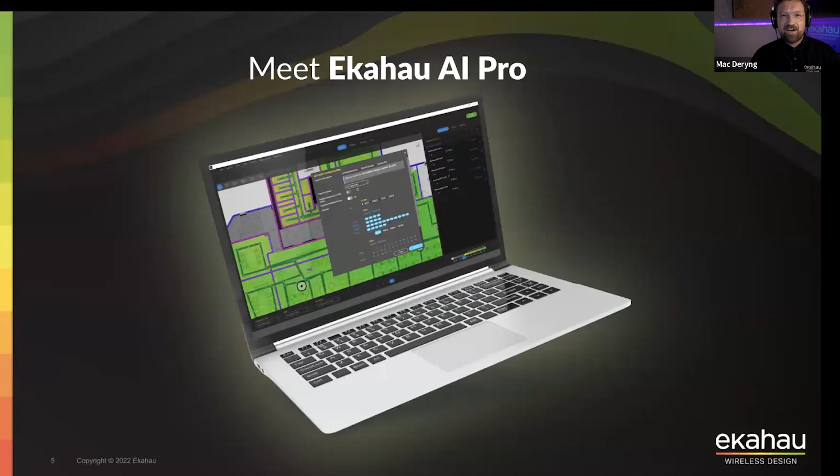But why we are here today, I'm going to let Mac talk to us about. Thank you very much, Matt. We really thought that we were masters at sneaking in those little hints here and there. We wanted to hide it very well, but we failed at it. You outsmarted us, you got us properly. So well done to all of you Sherlock Holmeses from around the world. You got our hints and you predicted what's coming. So, ladies and gentlemen, boys and girls, it's time to lift the curtain. We wanted to introduce to you our new smashingly amazing, extraordinary, sexy product. Meet Ekahau AI Pro. The time for 6 gigahertz is now.

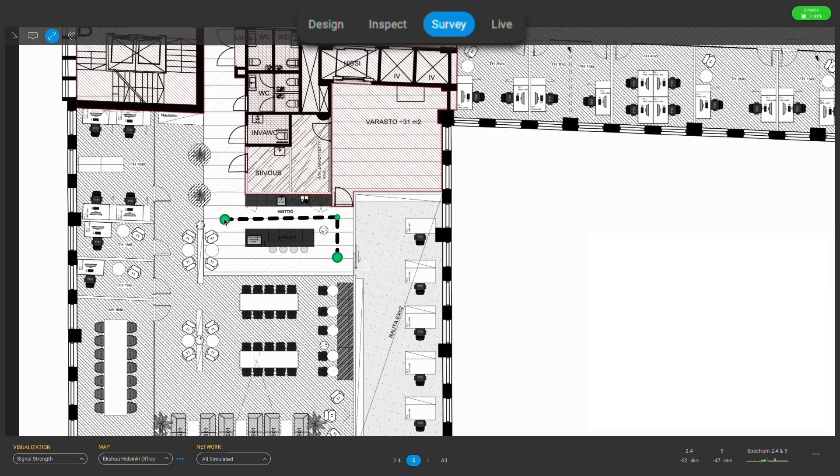Well, if we weren't pumped up and excited before, then I don't know how we're going to contain ourselves. That was just freaking awesome. I completely can't contain myself, Matt. I have never been more excited in my life. So needless to say, I won't be able to sleep for at least 6 months straight now. I haven't slept all week. I've been so excited for today and this webinar.

But over to Anssi and Mikko to formally introduce to you Ekahau AI Pro. Thank you, guys. Your excitement is very catchy. I'm getting very excited as well here. So we can finally talk about it. This is a huge day. You know, we've actually been waiting for a while until we could start talking about it. I'm sure this is something that our users have been waiting for a long time. But also, this is an important milestone for the entire team.

Someone might remember that we actually talked about this for the first time already 2 years ago, right? There was an Ekahau Wi-Fi Day event in spring 2020. And in that one, we actually made a forecast about the Wi-Fi 6E rollout. I think our assumption back then was that the mass rollout would start in early 2022. And that actually seems to be pretty much right. We can see the first trials now, and we can see the first access point models in the market. We can even see some first commercial deployments.

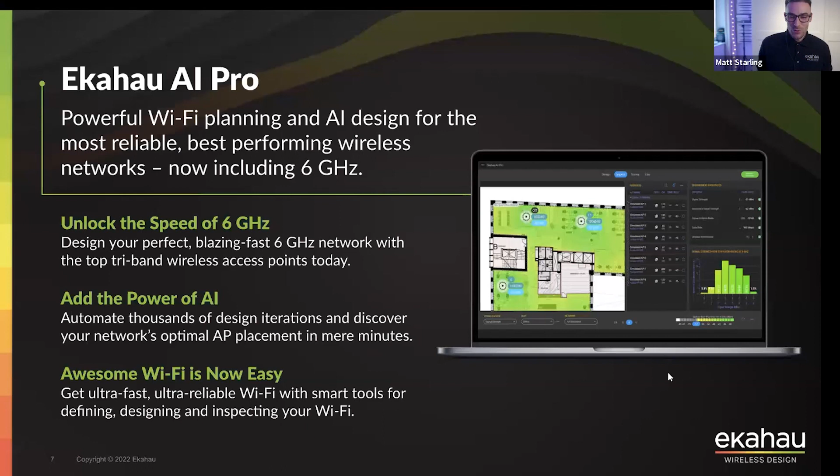Cool. So actually, you know what? Whilst we were in Helsinki, you weren't too forthcoming with answering some of our questions, and we were trying to get into some of those meeting rooms and you were kicking us out. We wanted to get some answers. And you know what? We thought, what better time to do it than on a live webinar and just put you on the spot, because we've got these questions.

I know that there's going to be people in the audience wanting to know the same answers. So first of all, to you, Anssi, is AI Pro a free upgrade for all users with a current support subscription? Yes, absolutely. Wow. Another question is for you, Mr. Mikko. If I open up Pro later today, will I get a prompt to download a new version? Yes, it will. Give us a bit of time. So after the webinar, it will be available.

Amazing. That is amazing. And then another question for you, Anssi. Does AI Pro support both macOS Monterey and Windows 11? Yes. Great. And the last question for Mikko. Does AI Pro work with the Sidekick? Absolutely. So answer is yes. Oh my God. Fantastic. Great.

Cool. So Mac, let's talk about unlocking that promise of 6 gigahertz. Why don't you cover 2.4 and 5 first? Sure. So today, we not only need to have more throughput, higher data rates, but we also need to have massively lower latency to support new applications that are becoming more and more popular, like VR or AR. And we also need to cater for voice and video on a daily basis in our lives.

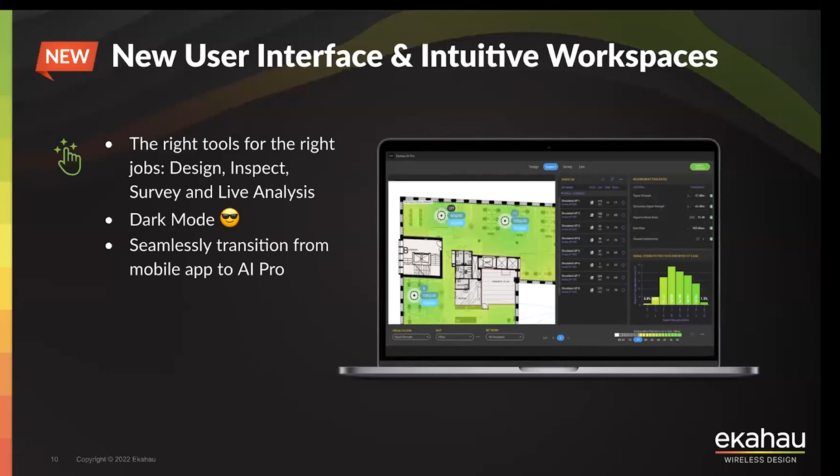And of course, there is a multitude of features that simplify the design and validation process. But maybe enough talk, and let me give you just a glimpse of what I mean. All right, so let's unbox AI Pro. When you launch the application, you will be faced with the welcoming screen, and here you can create a new project, open one from your local drive or from Ekahau Cloud. I have a couple of examples we can use to see all the new layouts and some of the features. So let's open this up.

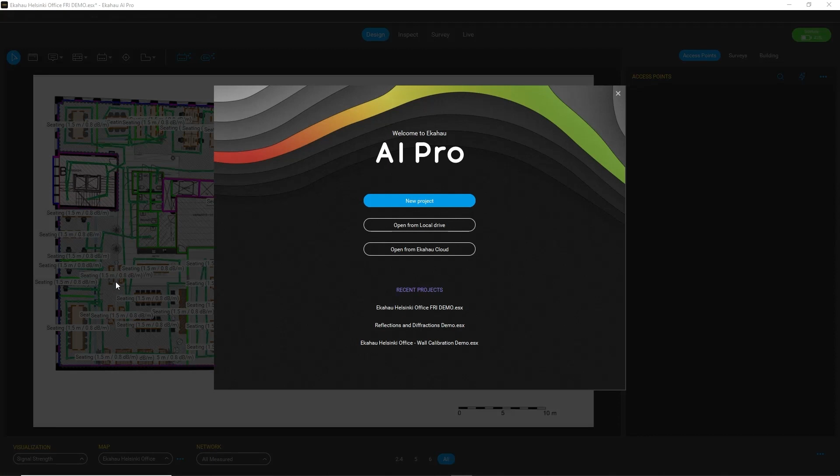And the first thing you will notice beside the cool new dark theme is that the layouts are different. We put a lot of emphasis on the usability of the product. And one of the aspects I want to highlight is the new workspaces. So here we have introduced separate workspaces like Design, Inspect, Survey, and Live. The main point is to separate different functions to these workspaces so it's more intuitive to use.

For example, in the Design workspace, the main function is to bring your floor maps in, define the buildings and draw the walls, as well as define the requirement areas and requirements, and of course set up and define your wireless network by placing access points or using some automatic tools to do that for you. So that's the main function of the Design workspace, to be able to define your environment.

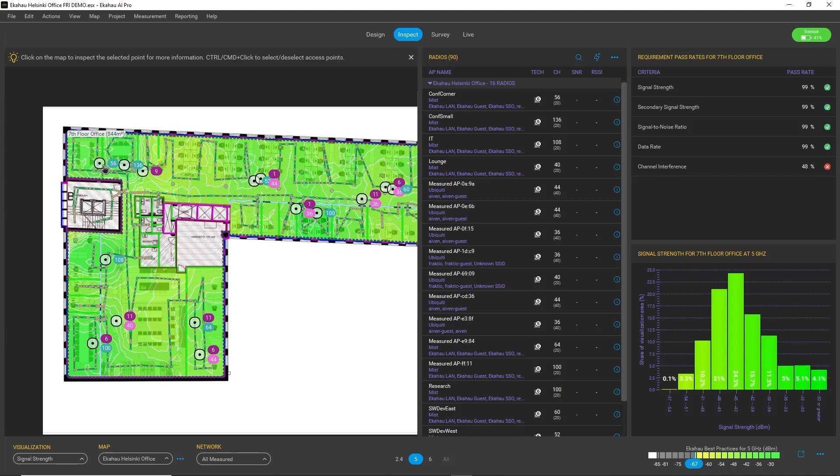Moving on to the Inspect workspace, the beef of the Inspect workspace is to allow you to analyze your data. You can select any spot on the map and it will immediately highlight to you the connections and what access points are heard from this location.

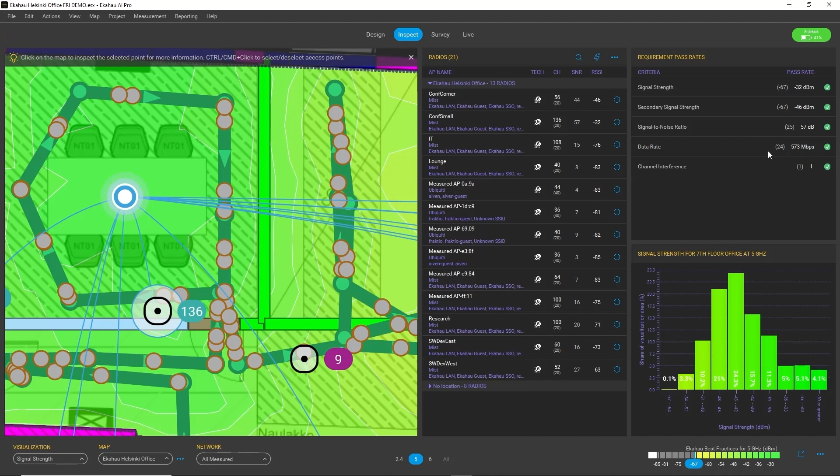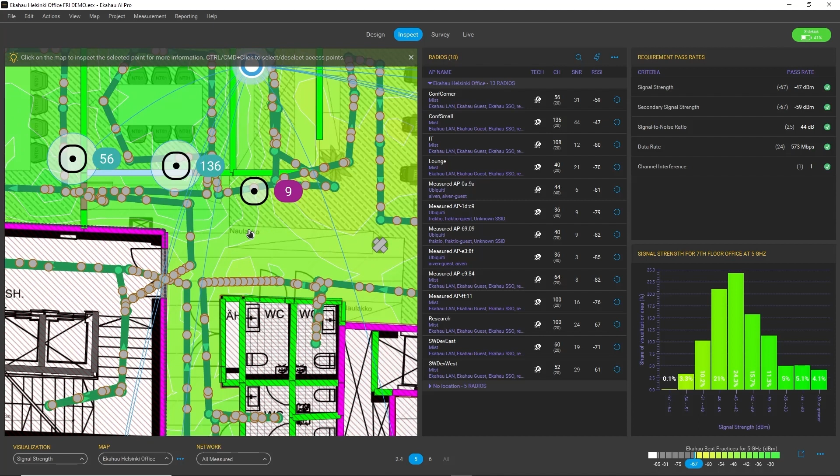And you will notice also on the right hand side that the values are automatically updated. So all the requirements that I have in my requirement profile are now shown in the list. I can immediately see from the list whether some requirement is met in this selected spot or not. So a very handy space to analyze this kind of data.

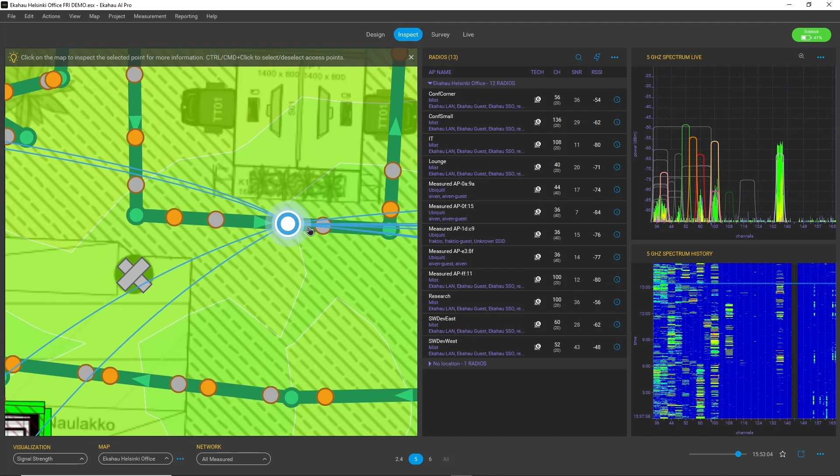In addition to that, I can also select any spot of my survey path, and that will immediately highlight the spectrum graph from my Sidekick as well as the waterfall graph. I can scroll through these measurements and analyze them separately for these spots, or if I deselect everything, I will see a summary of the whole floor and the requirement area. So I can immediately with one glance analyze whether this requirement area is meeting my requirements or not.

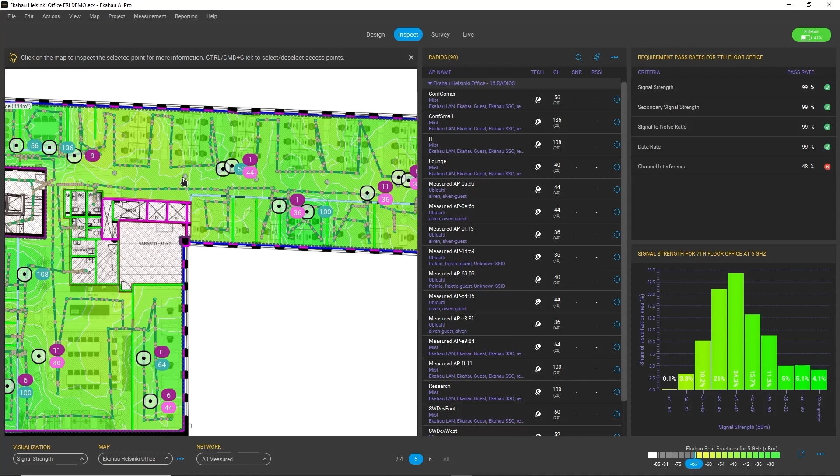If we move on to the survey workspace, this must be familiar to you if you have been using our iOS mobile survey application. So now these spaces are in line with our apps, and you will also find the continuous and stop and go survey capabilities in this space. This is meant for on-site surveys.

And the final and most interesting workspace is our live workspace, where the power of Sidekick becomes apparent. So here I have my Sidekick connected. I can see the spectrum real-time view. I can select different access points. I can also view the waterfall graph and switch between the radios view or the channels view.

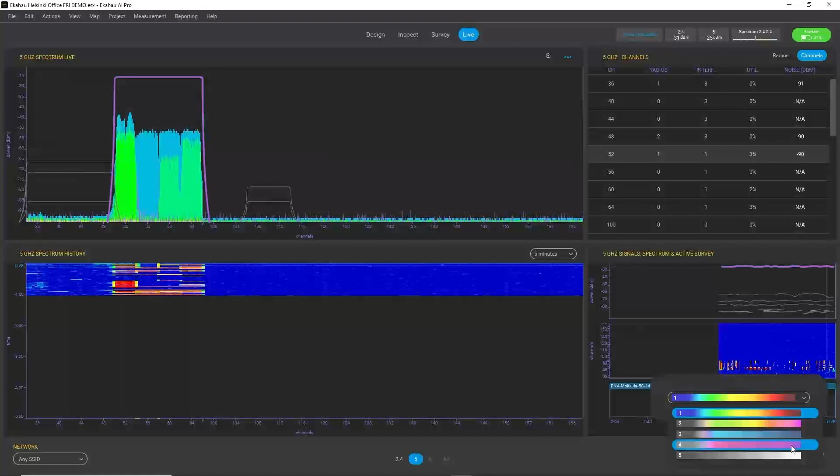One new cool addition in AI Pro is that you can also now switch between different color schemes for accessibility reasons. So if you are not able to distinguish some colors, you can always switch to the Miami Vice theme to see the colors in this mode.

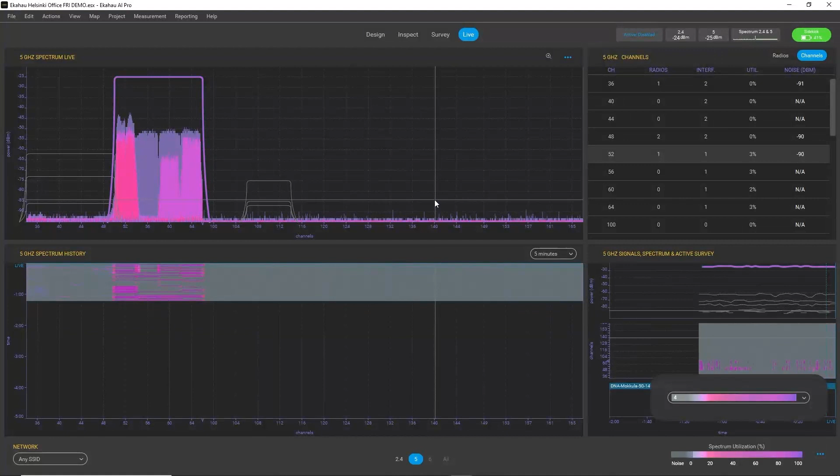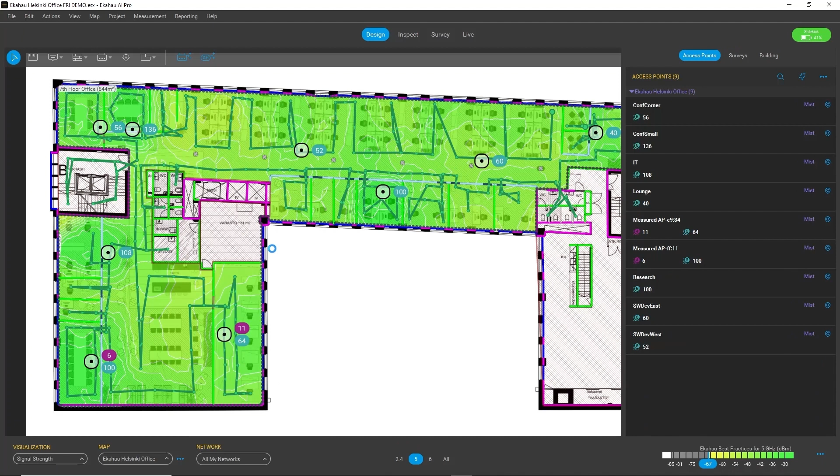Going back to the design workspace, one interesting feature that we added to AI Pro is that here we have a brand new network filter, which allows you not only to filter out a custom access point group, but you can also filter out any network or all your networks you choose. So a very powerful tool for filtering out your access points and viewing different heat maps.

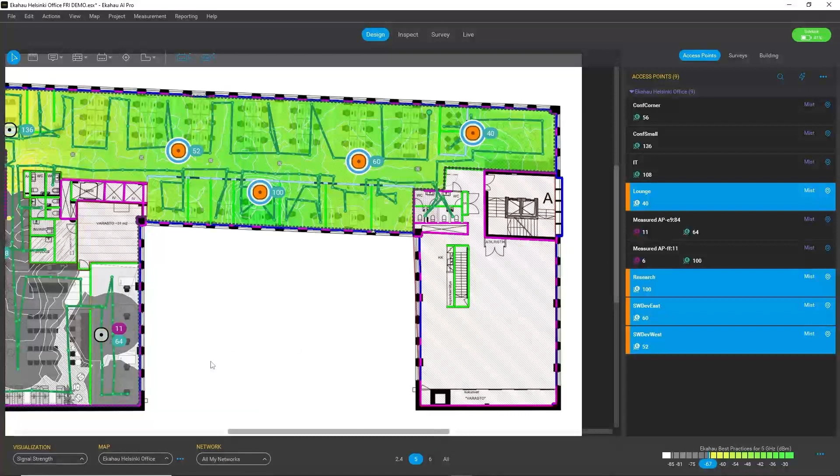You can also define a custom access point group. For example, you can choose the access points here on the east side of the office, and by right-clicking on the list and marking them with some color like orange, I can create this custom group and it automatically becomes part of the filter. So a very powerful tool to select different groups and analyze your heat maps.

So this is just a small example of the new stuff we have implemented, and you will find many more positive surprises once you start using AI Pro. So very proud of this.

Oh, Vlad, there is so much goodness there. First of all, dark mode. Hello, who doesn't love dark mode? Every time I've opened up AI Pro, it puts a smile on my face from ear to ear. I absolutely love the dark mode. It looks amazing. And also the dedicated workspaces now for your specific project tasks and needs. You can tell how much thought went behind that with the team for our users.

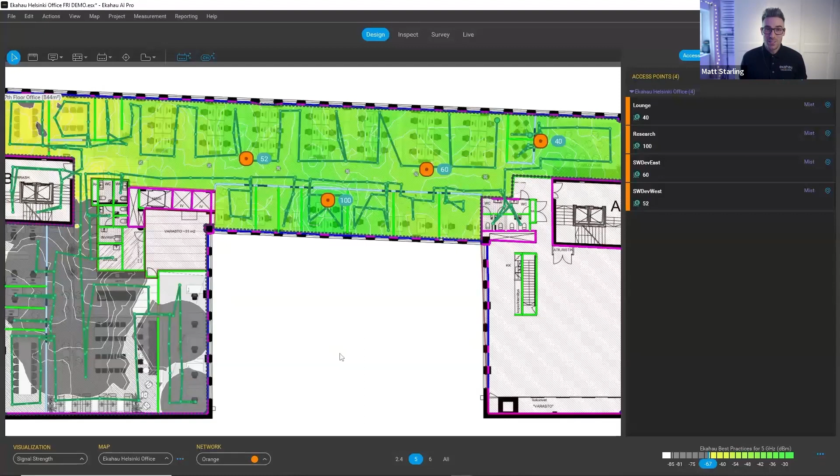But wow, the power of the Sidekick and the live view, being able to see that beautiful high resolution spectrum data. Oh, and the new feature about being able to choose your own color scheme for the spectrum. I think we can all guess what's going to be my new default. I love that Miami Vice color scheme.

And if you need more proof that we both love the Miami color scheme, just look at our backgrounds. Guys, every time I switch to the Miami Vice color scheme, I want to cry from happiness. All right. Wow, that was amazing, Vlad.

But I think we've got to talk about AI Auto Planner now. Yeah, and I actually wanted to ask something of you, Matt and Mac. What do you think are the most tedious and boring tasks you have to deal with when designing wireless networks? Is there something like that in your life? I see what's happening here, Mac. They want to get their revenge and put us on the spot live on the webinar now.

Fine, fair enough. For me personally, what I think is sometimes the most challenging, especially if you're quite new to Wi-Fi or even if you've been working in Wi-Fi for a long time, is coming up with the positions of the access points in the right locations with the right configurations, right first time. And especially if you're working on a multi-floor project, that can be really time consuming and quite daunting if you're fairly new to Wi-Fi, to make sure you design a high performing wireless network.

So that's what I think, Vlad.

Oh, well, for that purpose, we actually, I think, found a small part of the Holy Grail. Well, at least I hope that that's the case. So now we are able to run AI Auto Planner for your designs, and the AI Auto Planner actually runs thousands of iterations on all three bands, including 2.4, 5, and 6 gigahertz, and it looks at the optimal locations for your APs, taking into account the specifics of your environment, like the walls, the hallways, the room sizes, etc. So it looks at the holistic site as an optimization target, and the results are really amazing.

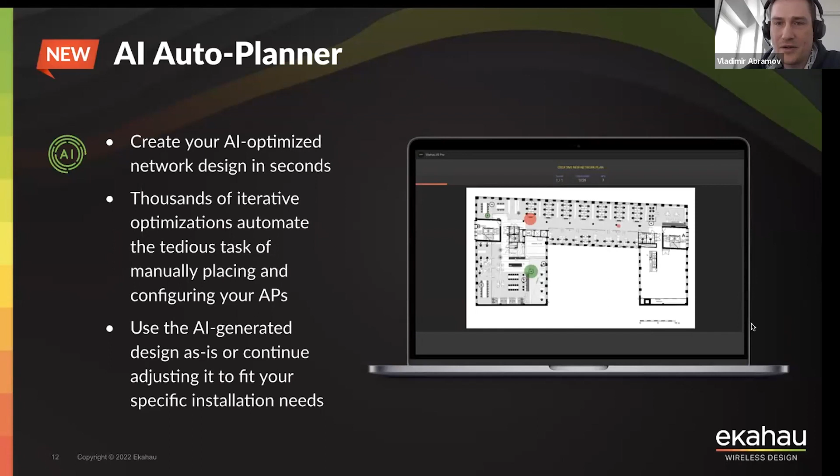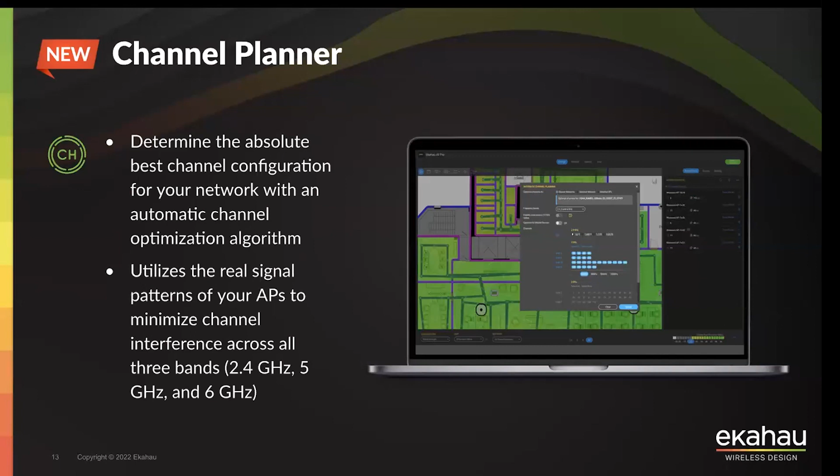And of course, AI Auto Planner has also another part, which is our channel planner. It has been completely redone, so it's a completely new algorithm that is superior, which takes the client perspective into account, and it of course also is aimed at all three bands. All is aimed at enabling you to do the 6 gigahertz Wi-Fi plans. But maybe it's time we take AI Auto Planner for a small spin around the house. How about that?

Let's now see how AI Auto Planner runs in action. So in this example, I have a 3-floor building. So I have main hall, then floor 1 and floor 2. And I have already defined my requirement areas and requirements for them. So here you can see a requirement area selected with Ekahau best practices applied. I have also some drywalls, some windows and doors, etc. defined. So my environment is all set. The only thing missing is my wireless network.

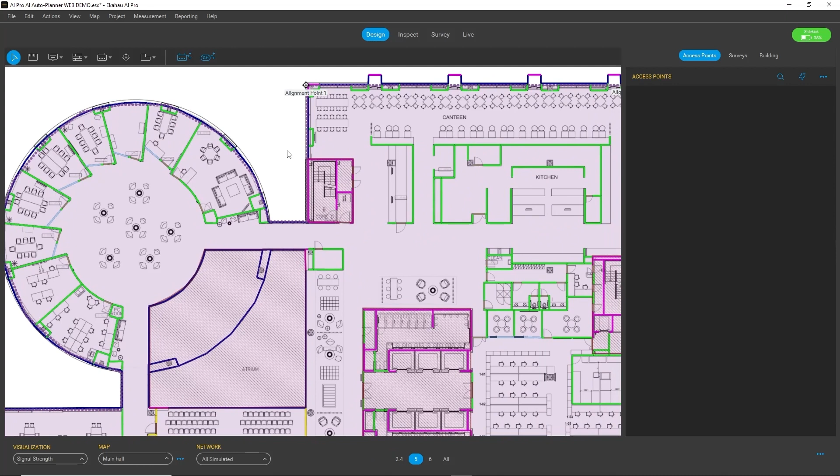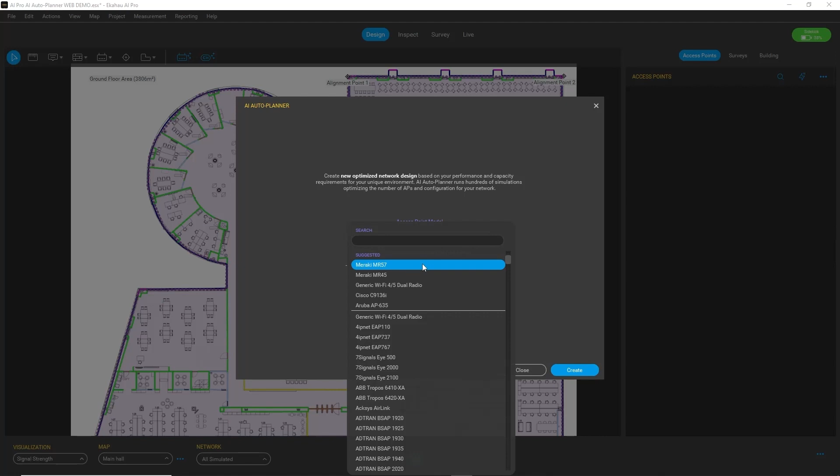And the fastest and easiest way to design it is actually to use the help of AI Auto Planner. And you can find AI Auto Planner from the Actions menu as the first selection. When you fire it up, you will see that you can select the desired AP model for your plan from 1,000 of access points that we support. In this case, I will use Meraki MR57, which is a 6 gigahertz capable access point. So we're now designing for 6 GHz in this plan. I could start the planning process already, but I want to show you first some of the advanced options.

So what you can choose in addition to access point model, you can, for example, define transmit power for each of the bands or select antenna height that you will use. You can also check that all the requirement areas and floors are included in your plan, because the AI Auto Planner not only runs on a single floor, but it optimizes the plan for the whole building. In addition to that, you can optimize for capacity or for mobile devices.

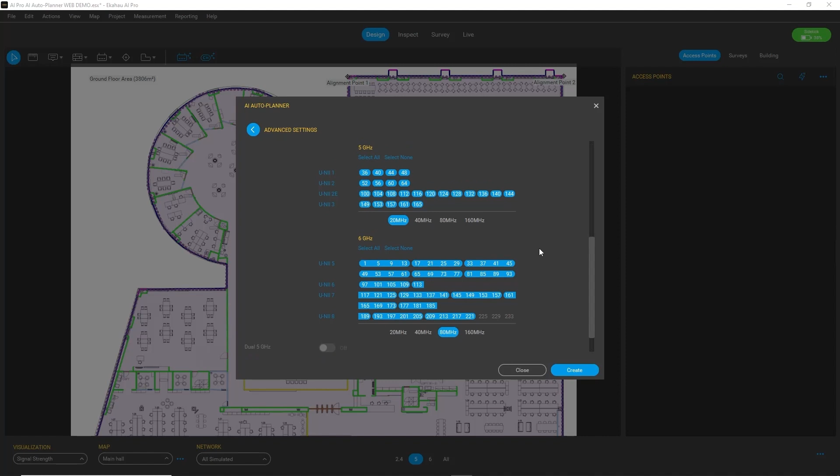And actually, the new channel planner is also part of AI Auto Planner. It's a completely new algorithm which provides you with the optimal channel plans. So, for example, you probably will always be using channels 1, 6, and 11 on 2.4 gigahertz. But for the other bands, you can select any bandwidth and channels you like, as well as for the 6 gigahertz band. Just make sure you have a proper regulatory domain selected so you have the right channels available for you. In addition, you can also configure your network for capacity, for example, by choosing the minimum data rate or number of SSIDs per radio.

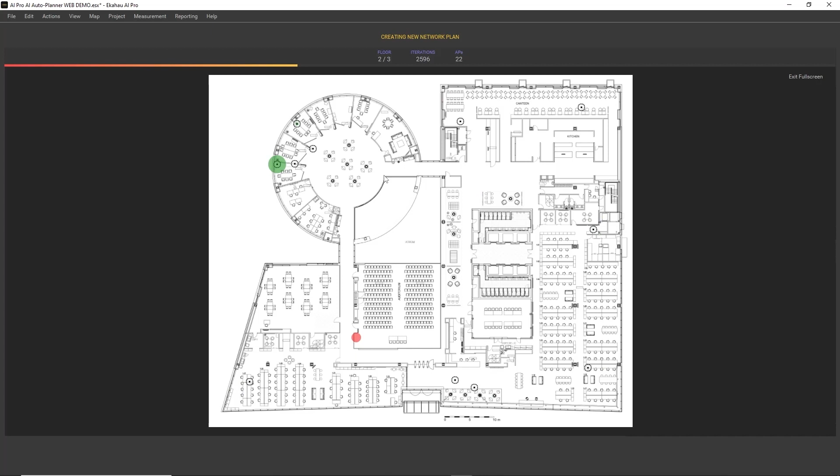In this instance, I will not change any of these settings. I just want my 6 gigahertz network to be planned automatically. So I click create and see what happens. What's going on is that AI Auto Planner is now placing access points on all of my floors and trying to find optimal locations for them, as well as optimal channel configurations for all 3 bands, for 2.4, for 5, and for 6. So that's a lot of work, but as you can see, it's already deploying the plan, and voila, here it's ready. Just a couple of minutes and your brand new plan is complete.

But now we actually need to analyze the results. We need to check what kind of a job the AI Auto Planner did. So we can see from the summary bar that our network health is at 99% pass rate for 2.4, 99 for 5 gigahertz, and 98 for 6 gigahertz. So extremely promising results. And this is a result of almost 5,000 iterations that AI Auto Planner ran on this building. And in total, it resulted in 33 APs.

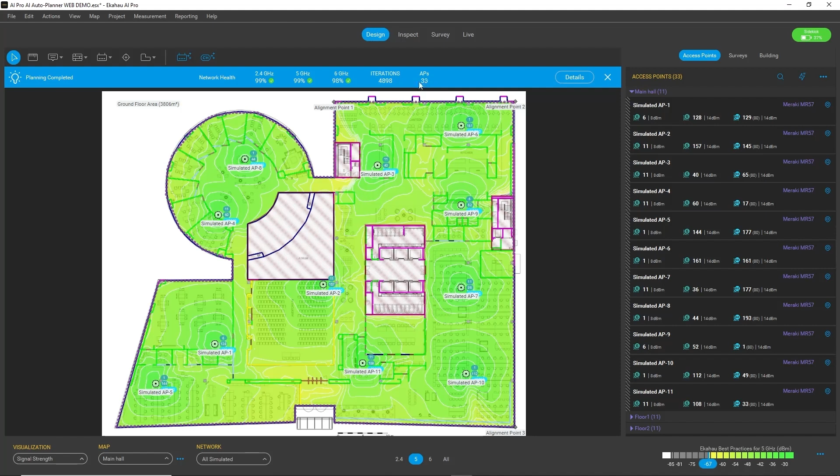We can check the details to see how these APs are distributed. So for each floor, you can see a breakdown. So you have 11 APs for each floor. And on all floors, the network health pass rate is almost 100%. So extremely good results from AI Auto Planner. But let's not stop here.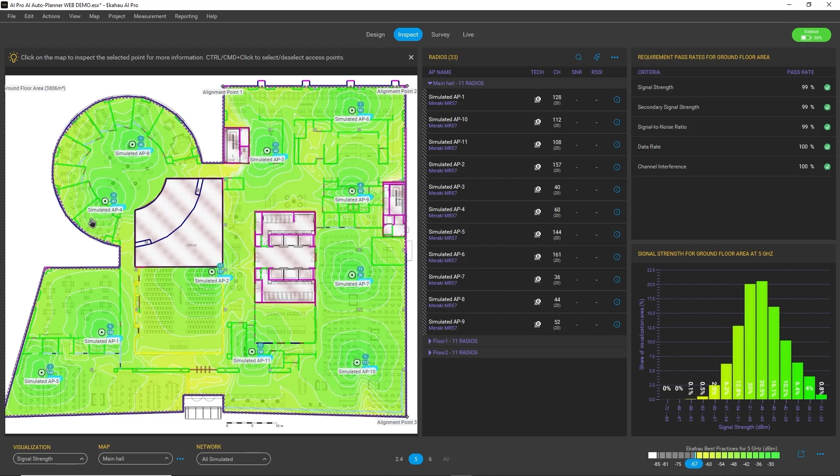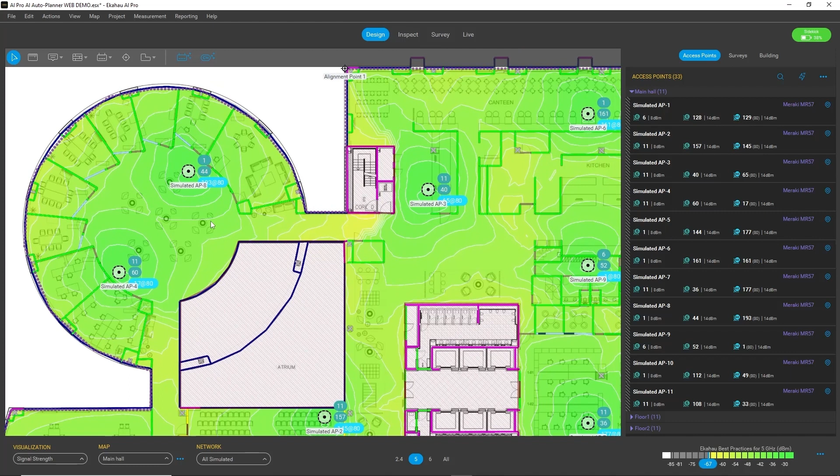And of course, you can still manually, in design mode, for example, go ahead and change any of the access point locations, but the hard lifting has been already done for you. So I'm pretty excited about these features and I hope you enjoy them. So basically we want to leave only the fun stuff to the users and let the machine do the tedious part. Yeah, I mean, Vlad, whoa, wow, that was amazing.

And first of all, that wasn't a matter of minutes, that was seconds to run 5,000 different iterations and come up with an awesome Wi-Fi design across multiple floors. I can't even fathom how long that would take me to do. So to be able to do that with simply a click of the button is just amazing. This really is going to be giving our users the most valuable currency of all, which is time that you can spend working on other tasks, other projects, making your jobs easier, making Wi-Fi more amazing.

So this really blew my mind, and this is one of my favorite, most cool new superpowers that we get with AI Pro. So yeah, I totally love this one. Totally same here. And if it saves you time, it also earns you more money. And my favorite thing now is the new channel planner that plans from the client's perspective, which is absolutely awesome. So well done, team. And thanks, Vlad, for showing it to us.

Yeah, imagine, that was a 3-floor building, right? Imagine if you're designing for 10 floors, 20 floors, 30 floors, how much time that would take you. But you can simply do it with the click of a few buttons to give you that amazing high-performing wireless network design. I mean, wow. And remember, Matt, this is not only for greenfield planning, so not only for clean slate designs, but you can also use it to estimate upgrading your network and see what your whole network would achieve if you redesign it. So you can use it almost any time.

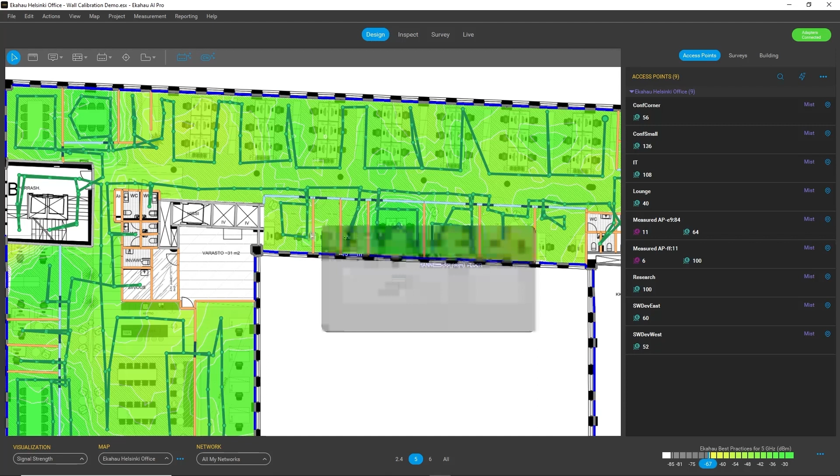So we can improve the situation and use wall attenuation for that. So let's see how it works. We go to the Actions menu, we choose the wall calibration function, and now we can see that it actually analyzes the measurements from your survey paths with Sidekick, and it proposes changes to the default values of different materials.

So for example, for thin door, for the 2.4 gigahertz band, we have a suggested change from 2 dB to 3.5 dB, and there are also suggested changes for other bands. And here the quality indicator means that we have a good or very high confidence level that this change will improve the definition of your environment. That's because of the Sidekick providing many measurement points, and we can say that this change will be a good thing for your environment.

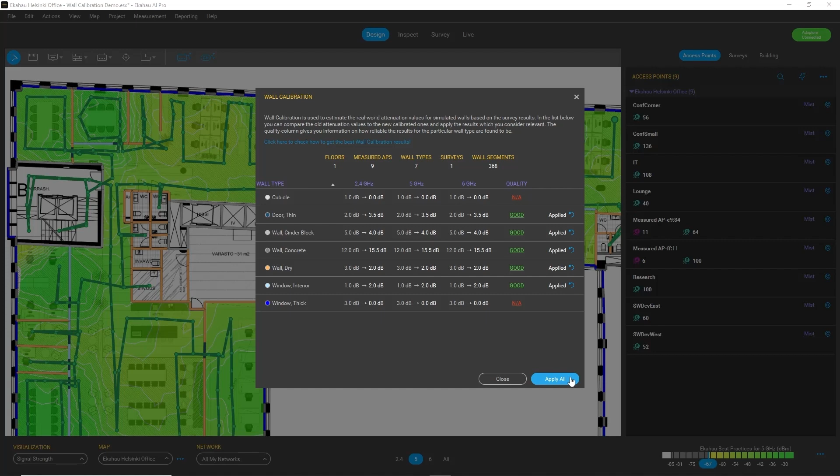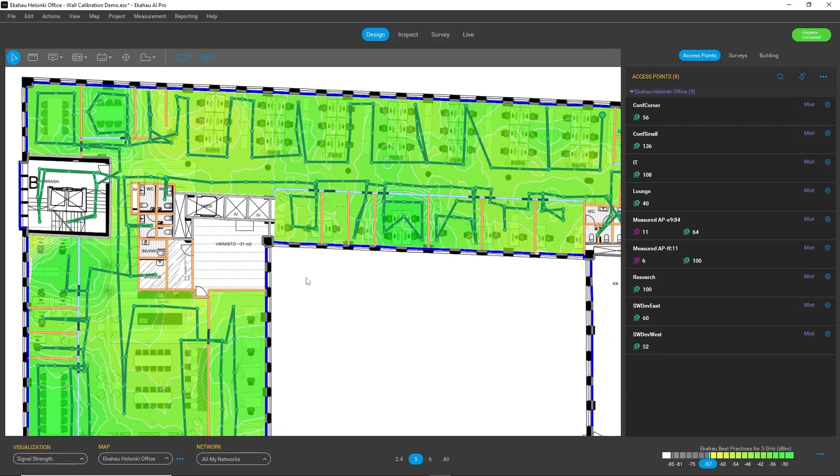So I can apply these changes one by one, or I can apply them all from here. After I apply these changes, when I select some wall material, for example, this window, I will see that now it has the calibrated value based on my measurements here. And the end result is that whenever you do a simulation or other action on top of this environment, it will be much more accurate and correspond much more closely to reality than the default setup. So a very handy feature to improve the accuracy of your simulations. And as you noticed, the wall calibration proposes values for each of the bands: 2.4, 5, and 6.

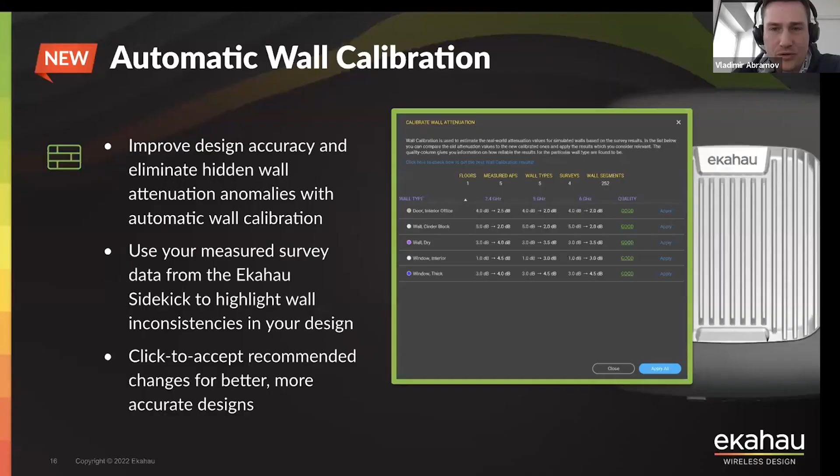So you now know why we call it AI Auto Planner. A lot of AI going on under the hood, right? Of course. And guys, this is such a massive deal. I'm not sure about you, but every time I go to the site and measure wall attenuation multiple times for multiple types of walls, I'm a little bit bored. And not only will this give us better accuracy, but it also saves us a massive amount of time. So it's not only time saving, but it's also extremely easy to use.

So all it takes is to go to the site, ensure that you have Wi-Fi coverage in the area that you want to measure wall attenuation of. It can be the AP on a stick, or it can be a brownfield Wi-Fi, and walk on both sides of all the walls that you want to measure attenuation of. And then you can let the AI Pro do all the maths and heavy lifting for you. How amazing is that? This is a game changer.

This feature is amazing. Taking the guesswork out of what is behind the walls. I can guarantee most of the audience, if not all, has gone on site at some point, walked up to a wall, knocked on it, trying to work out: is this hollow? Is this hard? Is this drywall? Is this drywall hiding a brick? And we no longer have to worry about that guesswork. We can know for sure with the power of AI and the Sidekick to tell us this information.

I mean, if I had a hat on right now, I'd be taking it off for you and the rest of the team, because this feature has completely blown us away. It is awesome. So amazing. Well done, guys. This is such a fabulous feature. And like Max said, it's going to save our users so much time that they can focus on other things, working on more projects, getting back to the fun tasks of Wi-Fi project work. So yeah, love it, Vlad. Well done, man. Same. I said it would be 6 months of sleepless nights for me from all that excitement, but now it has increased to at least 12. Yeah, I cannot wait to start using this even more now.

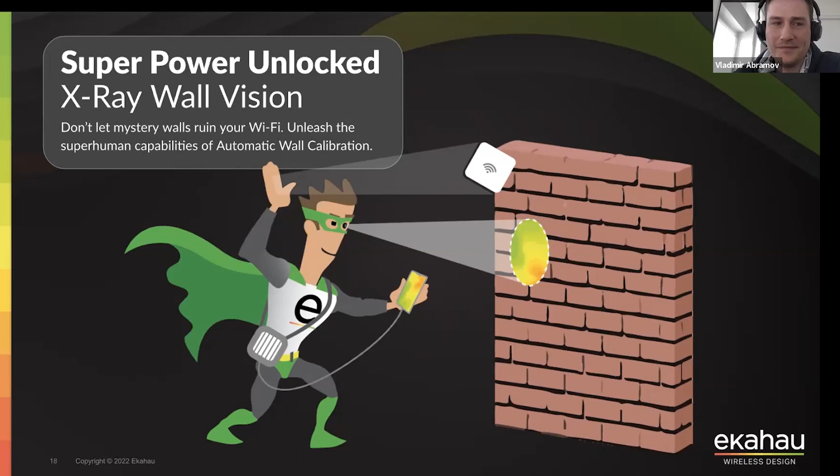Exactly. Yeah. Vlad, I'm almost a little bit shocked here that there's more goodness, even more new features. I mean, I'm blown away by all of the new ones already, but how is there more features, Vlad? What is this network simulator? Why stop once we started? Why stop now, right? Let's continue the pipe. So let's give it all.

Well, so the next one is the network simulator. We already saw how you can create plans automatically with AI Auto Planner, but that's not all. We want to also introduce a new feature called network simulator, which actually enables you to create multiple scenarios, especially when you're considering to upgrade your current network, for example, with some other AP models, upgrading to a 6 gigahertz network, and how it will behave. For example, if you have not well-performing Wi-Fi, will simply replacing your AP models with 6 gigahertz capable APs solve the issues? For that, you can use network simulator to look at what will happen when you do that rip and replace scenario.

And basically what I want to show you now is to jump into the demo and see how the network simulator does the trick. Network simulator is a very handy tool to build multiple scenarios and test whether replacing your current access points with some other AP model, for example, a 6 gigahertz capable access point, will actually improve the quality of your network, or whether some other action is required to improve your Wi-Fi.

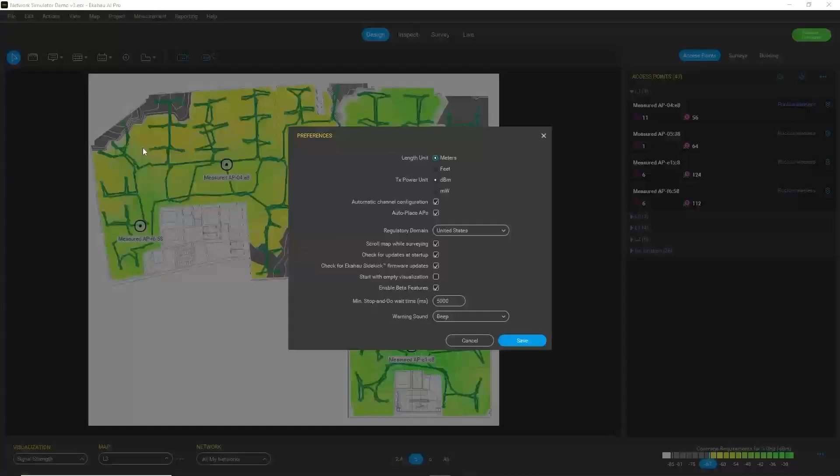First, what I want to do is make sure that the network simulator is available. For that, I go to File, Preferences, and check that Enable Beta Features is on. Because the network simulator is still a beta feature, it needs to be enabled there. And now you can see that the Actions menu has an option to choose network simulator.

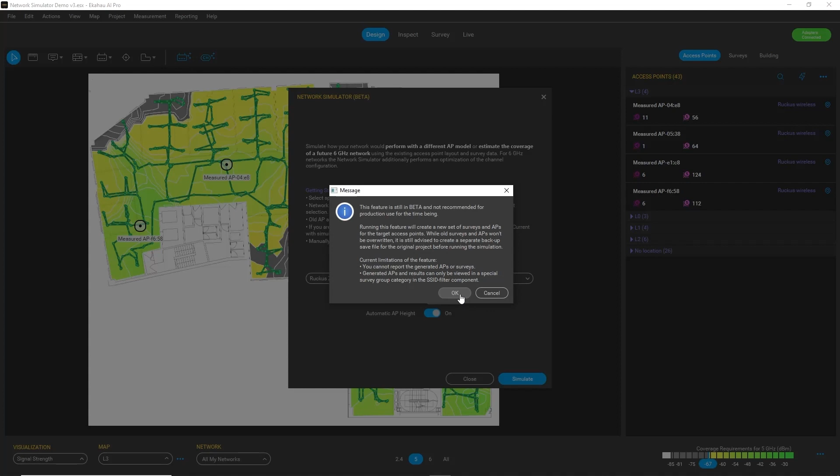So if you launch that, you will see a dialog where you can select your current access point model. Currently, I have Ruckus APs, and I need to select the exact model to be replaced. So I know that it is this one, 7363. And now I select the target access points, which will be used as the replacement. And I want to use a Cisco AP for that. I will use this access point, which is 6 gigahertz capable, so this C9136i. And now I will run the simulation and see what happens.

So what the network simulator is doing right now, it goes through all my floors and replaces my current access points with the selected Cisco access point. So after the so-called rip and replace scenario is complete, I can see the results of this replacement, and I can analyze the changes. Basically, the changes from my original situation to the replacement scenario.

And what I can see already from the summary bar is that actually my network health got worse by this replacement. So I can also expand the details and see that, at least on 2.4 and 5 gigahertz bands, on all floors but one, the network health got worse with this replacement. And of course, because I didn't have any 6 gigahertz capable APs in my original scenario, I can see that the network health results for 6 gigahertz are still not great if I use the same AP locations.

The beautiful thing about network simulator is you can always go back to the original data. So you can always use the network filter and again select all my networks, and you can see that your original data, your original access points are still here. So they are not lost or gone anywhere.

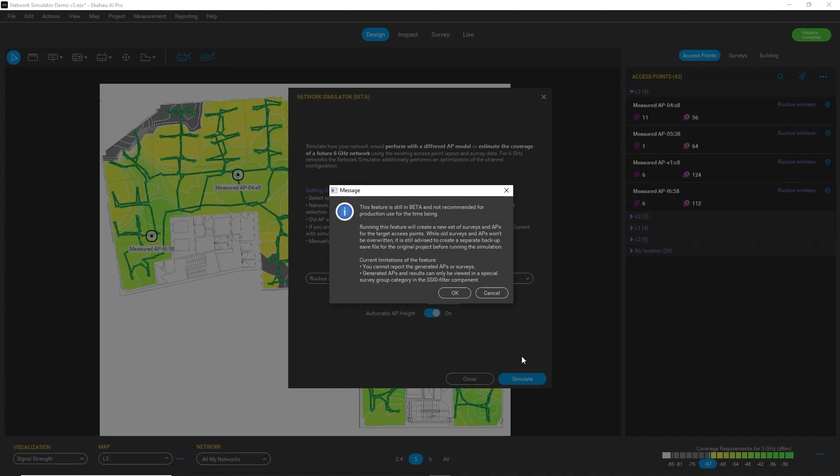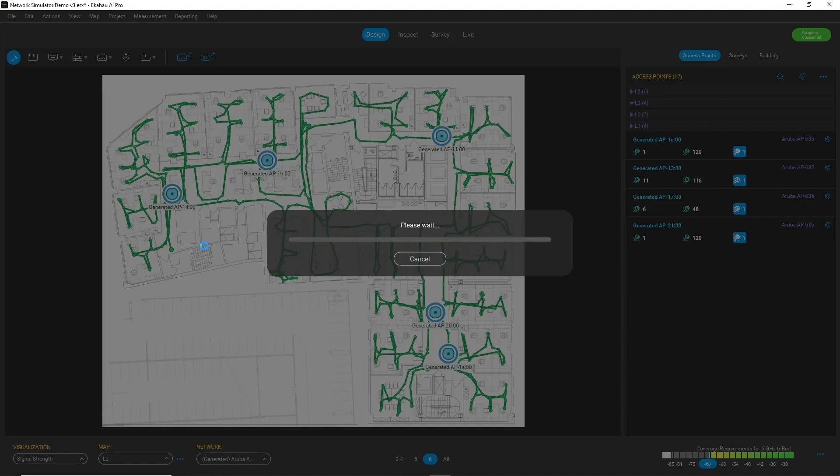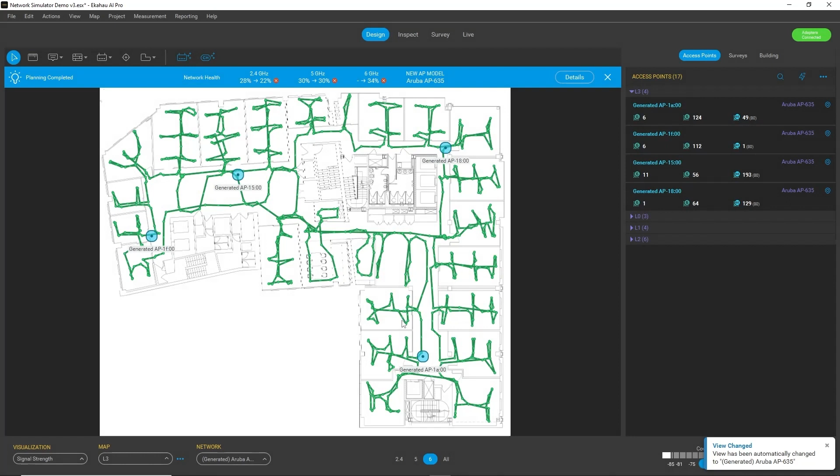So let's simulate and see what happens. And the process goes again, running through the floors and replacing access points with another AP model. And after the simulation is complete, I can again observe and analyze the results. So let's just wait for a minute, and here we go.

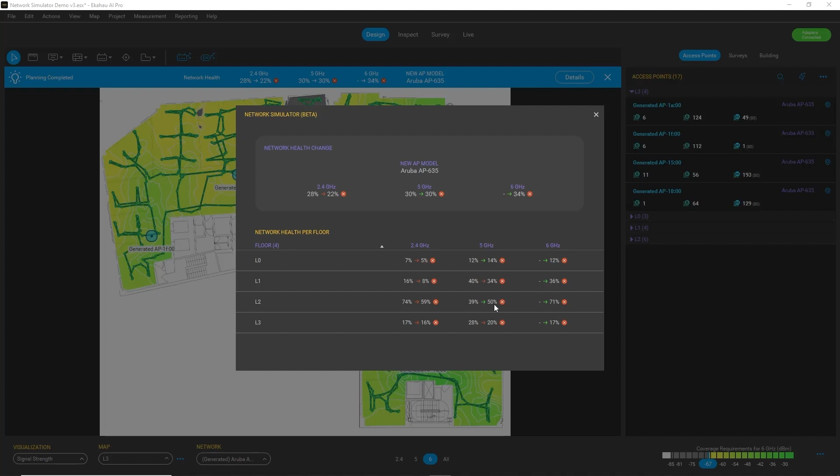So it seems that it's performed a little better, but still, for most cases, I see that my network health percentage pass rate is still very low. So again, looking at the details, yes, on a couple of floors, the network health got a bit better, but still for many bands and many floors, the situation got worse.

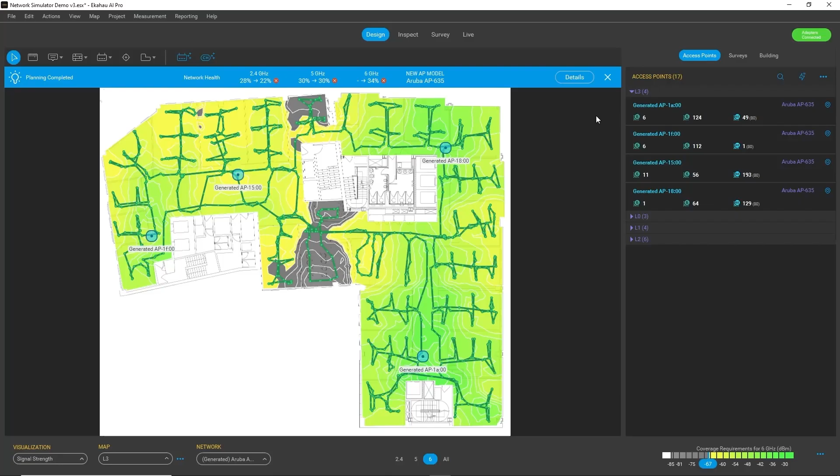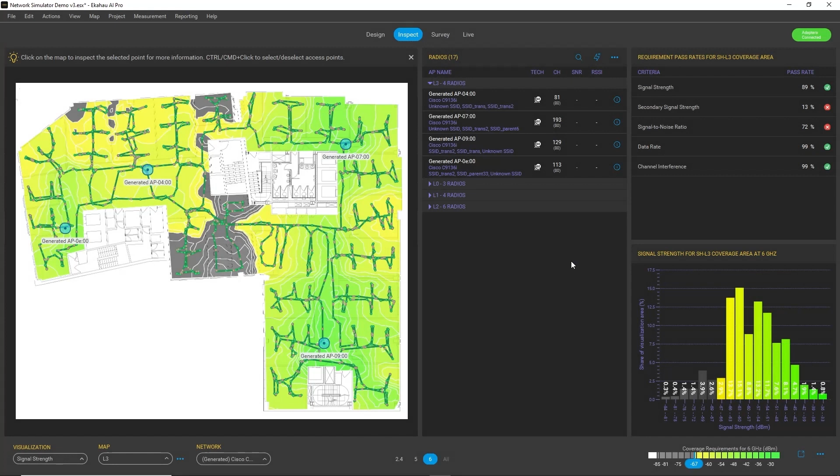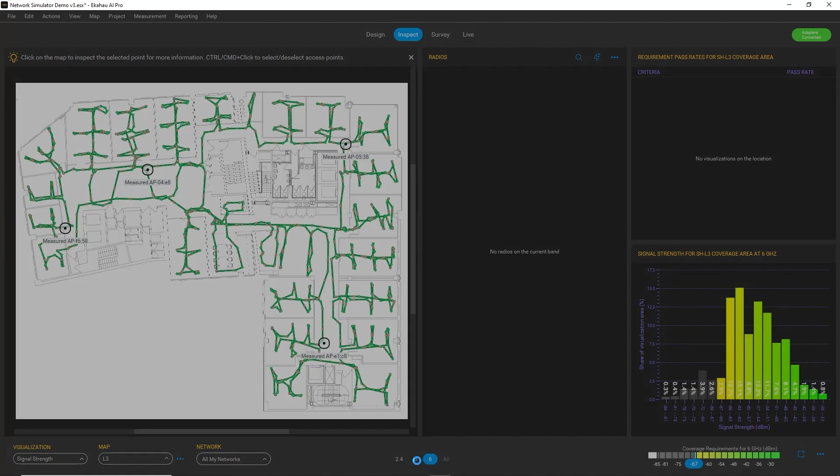So if I want to analyze these scenarios in depth, I can go to inspect mode, and here from the right hand side you can compare the metrics for different scenarios. So currently I have this replacement scenario with Aruba, and I can still choose the Cisco replacement scenario and see how it managed. And also, of course, I can compare it to my original network health, and I need to choose the right bands always. So for example, for 5 GHz band, I can compare metrics for different scenarios as well.

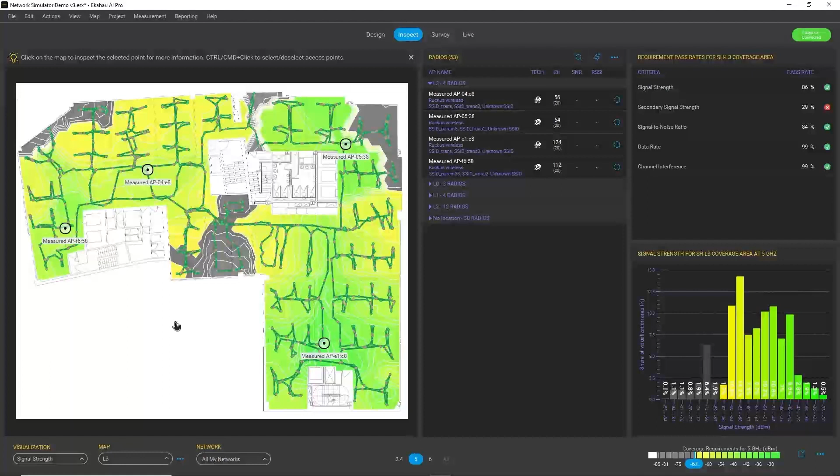So the lesson here is that simply replacing your access points with another model, even 6 GHz capable, will not necessarily solve your Wi-Fi issues, but some redesigning and real Wi-Fi design is required. So I hope you get the gist of the game with the network simulator, and also combining it with the channel planner and AI auto planner. You see that in AI Pro you can build any scenario for new designs or for existing network upgrades, and you can compare and make informed decisions and smart investment decisions as well.

Vlad, there is some seriously cool magic going on under the hood with that new feature. I have no idea how you guys have done it, but to be able to simulate and see that sort of information is so critical and key for our users. We know the main reason why most Wi-Fi networks are not great is because they never had a proper design done, or they never had a redesign done when it came to the upgrade lifecycle of their project, and they thought that just ripping out old access points and keeping their existing locations and just replacing them with a new vendor and a new model AP would solve their Wi-Fi issues to meet today's requirements for Wi-Fi performance, which we just know isn't the case.

So this feature really can save our users so much time, but not only time, but money, by not just investing in new access points without having a proper design done. And it gives our users the power and the confidence to be able to simulate and show it. So this is amazing. And also, if you have an existing network 2.4 and 5 GHz enabled, and you might think that just rip and replace with 6 GHz enabled tri-band APs might fix your issues, you can simulate it without actually doing it, saving you disappointment and money, and highlighting that you might actually require a new design.

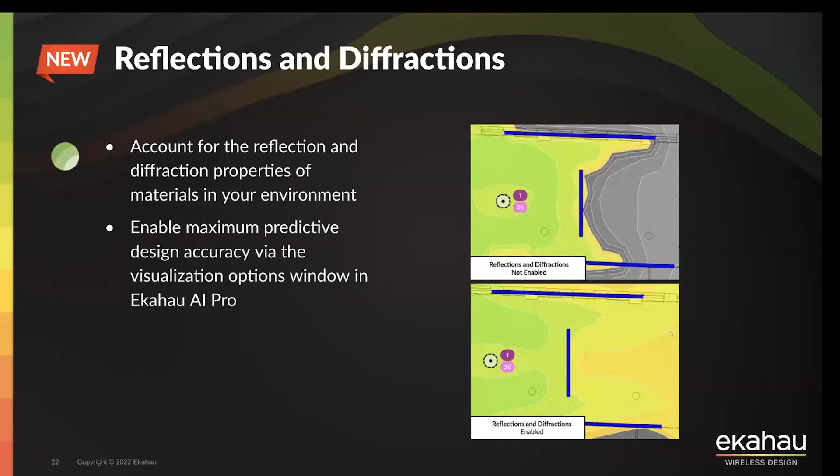Ekahau is known for beautiful and accurate heat maps, of course. So we are building on top of that once more and adding a reflections and diffractions feature to the accuracy setting of our tools. So basically, this is especially useful for complex environments, like, for example, some warehouses and places where you have different reflecting materials like glass or metal, etc. So giving more accuracy and ability to set the environment for exactly what you need is what we are achieving with this. But now I will show you how to turn on reflections and diffractions in AI Pro. So let's check it out.

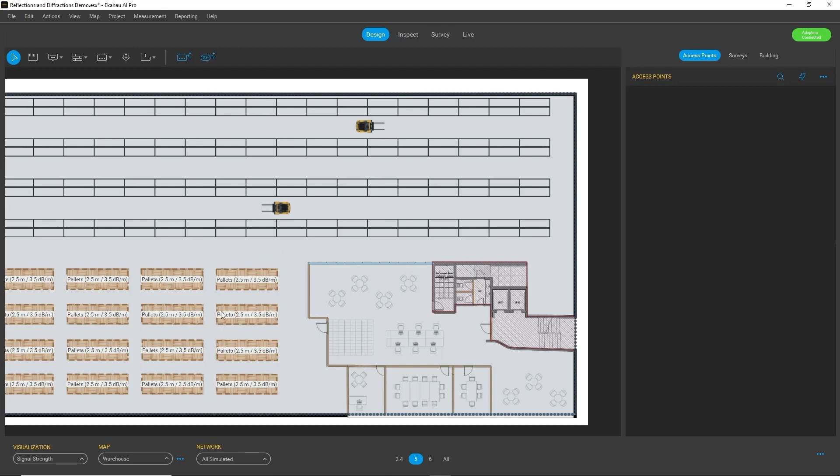We want our simulations to be as accurate as possible, and for that purpose we have now developed new visualization accuracy settings which account for reflections and diffractions. This is especially useful in complex environments like this warehouse, where you have many features like these behind-the-corner areas, some shelves, some pillars maybe. So let's look how it works.

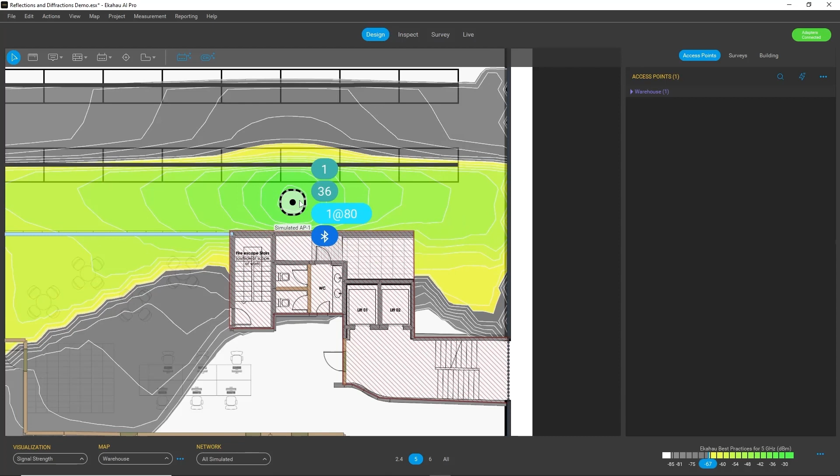Let's place an access point in this hallway, and we can see that I actually have a coverage gap here behind the corner, and if I move the access point around, it doesn't really help. So what I can do, I can now check my visualization accuracy settings by going to the bottom right, opening the menu, and I can see that currently my accuracy is set to high, and this setting doesn't account for the reflections and diffractions effect.

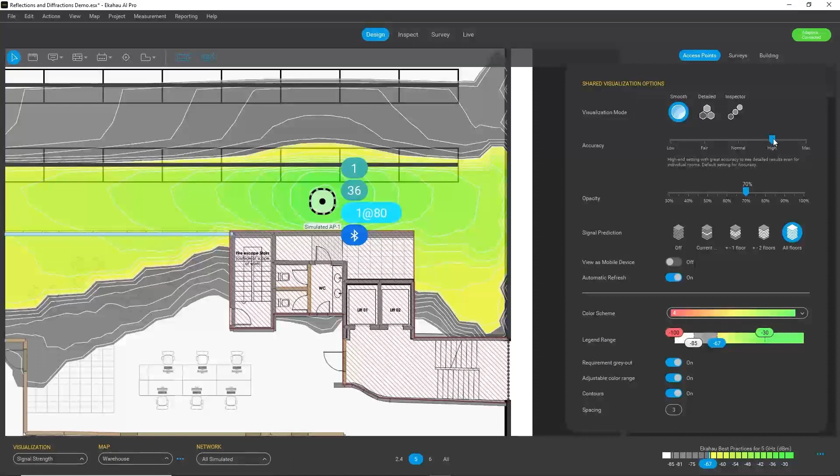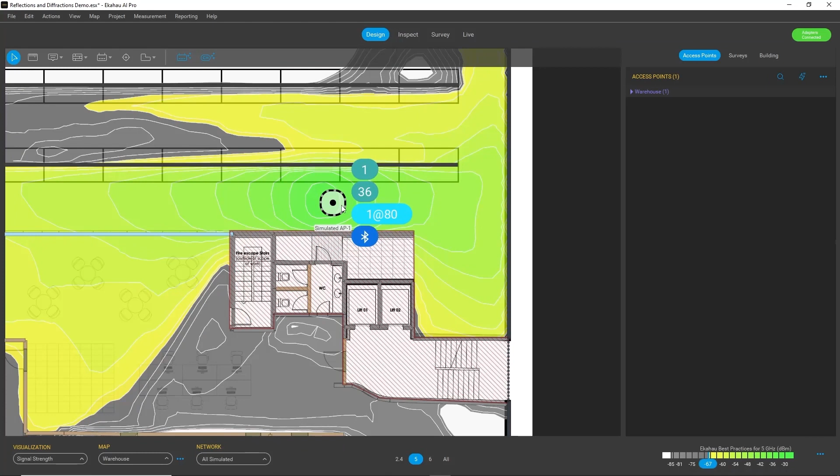What I can do, I can drag this to maximum, and now the calculations are run again, and now the reflections and diffractions are accounted for. So looking at the same corner area, you can see now that this is actually now covered. So if I move the access point a bit, you can see that the calculations take a bit more time, but also the heat map is now a bit different.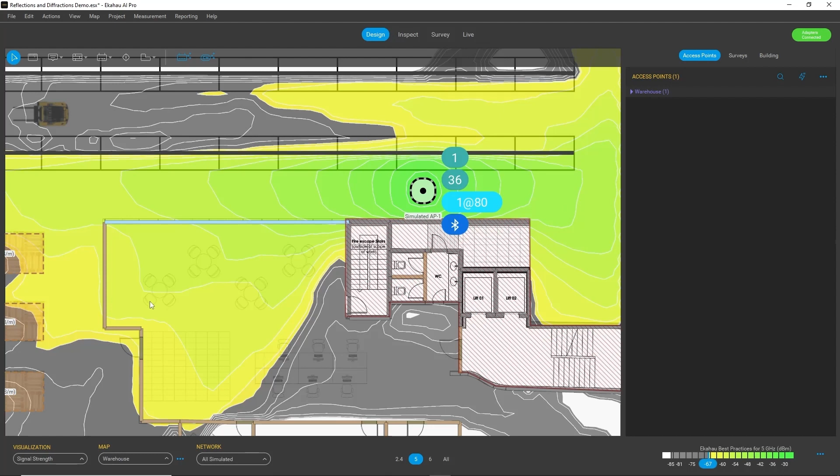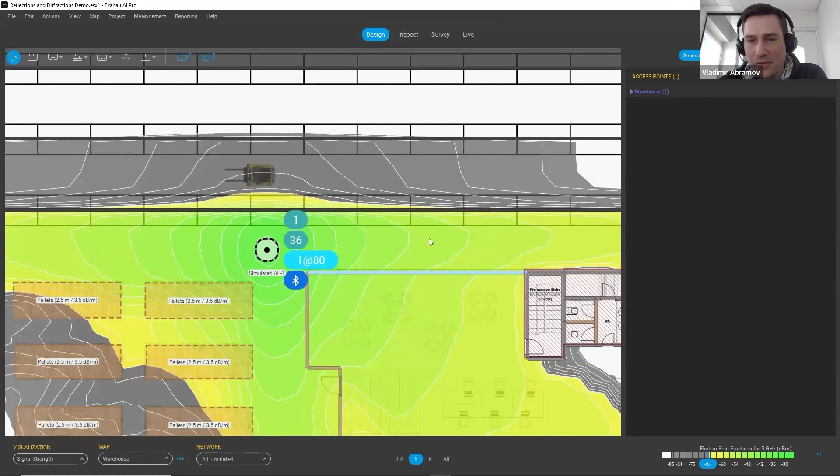So reflections and diffractions effect is very useful when you have complex environments, but for most cases where you have white spaces and less features, high accuracy is more than sufficient, and you can also notice that the updating of the heat map is faster with this setting. And this is just the tip of the iceberg of all the features we have here, but I hope you already have a holistic picture of what we are bringing up.

Big things. Vlad, 18 months no sleep for me now, because diffractions and reflections incorporated into predicting our coverage is a massive thing. So guys, if you have difficult environments, tons of surfaces like metal or glass, this will help you out. So we've talked about how it can improve your accuracy, but let's spend just 10 seconds and talk about what a diffraction and reflection is. So reflection, guys, is like a ping pong, where the signal is being reflected from a reflective surface. And diffraction is where a signal is bending behind the obstacle.

So let's say if you place an access point close to a column and you predict its coverage in typical high accuracy view, you will see that there might be lack of coverage behind that column. But when you enable reflections and diffractions view, max view on, you will see that that might not exactly be the case, and you might still have coverage behind that column, behind that corner.

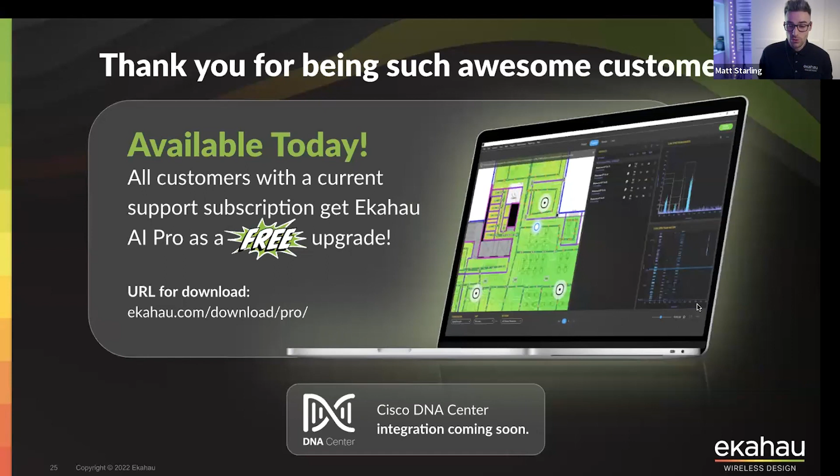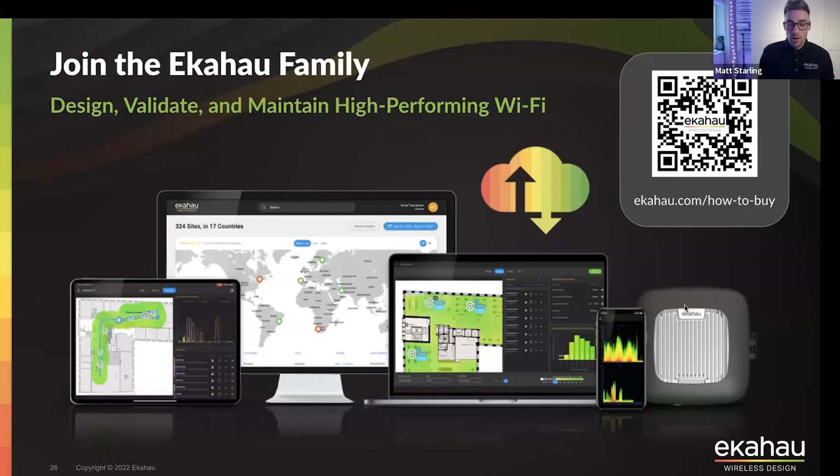So Matt, why don't we just very quickly try and summarize and recap all of the new things that we went through today. So first of all, AI Auto Planner saves users time and money by automatically creating a high-performing Wi-Fi network design in a click of just a few buttons. Inspect mode, it's a new workspace where you can inspect any spot on your map from either a predictive design or a validation survey and see if it meets your clearly defined Wi-Fi project requirements.

Yeah, and Channel Planner, ensuring your Wi-Fi designs or your deployments have as minimal channel overlap as possible. And Network Simulator, you might check without actually doing it if a rip and replace scenario with a newer model of access point will actually help you out or not. Typically, if your design was bad to begin with, you can simulate it and prove that your network does require a redesign. Absolutely. And then automatic wall calibration, no more manual wall attenuation measurements, saving you time and money on site with the power of the Sidekick combined with AI Pro.

Reflections and diffractions, making your visualizations more accurate, your predictive model better. You can use it especially with huge success in more demanding environments, warehouses, in industrial spaces where you have tons of reflective materials like metal and glass, for example, and you will be able to see that bending effect and how it affects your Wi-Fi.